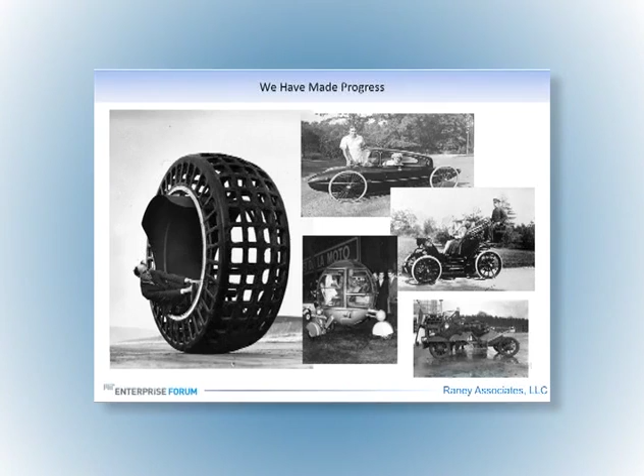Can we have the first slide? We've made a lot of progress in the history of the industry. This is stuff that happened in the pre-regulation days. In the years prior to the 1960s, when the US EPA was first established, it was just about anything goes in terms of what you wanted to put on a car or build into it, from safety standards to emission control systems. Next slide, please.

We're going to talk tonight about fuel economy. We've transitioned from the period of time when you probably struggled to even stay outdoors back in 1948, and later when photochemical smog first became prevalent in people's conversation down in Los Angeles. I've heard scientists say that if we hadn't finally understood the mechanisms of smog formation, you literally couldn't live in the basin today — which is probably true.

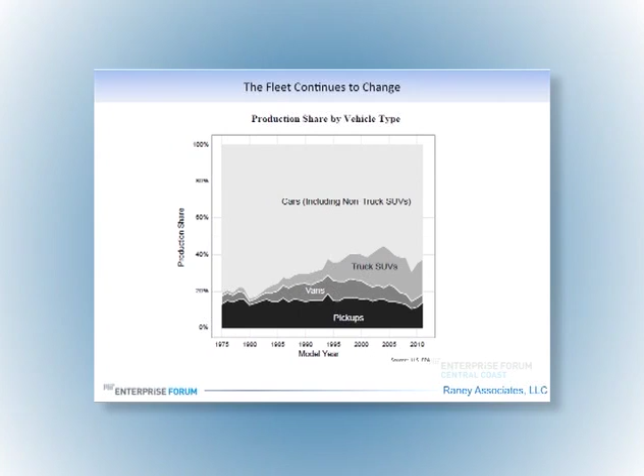This is just a shot of where we have grown in terms of truck volume. I won't spend much time on this — I've made the point. But interestingly, in the most recent fuel economy standards that hit the streets 3 weeks ago, the US EPA is not projecting much of a decrease in truck market penetration until 2025.

One interesting point is that the cost of driving is still relatively low compared to what it was back in 1985 and 1975. Compared to other parts of the world — for a gallon of gas in Norway today, you're paying upwards of $9 a gallon. In Italy, probably upwards of $7 a gallon. In the UK, it's about $8 a gallon. So we still haven't used the price point of fuel to get the customer's attention, and it is a significant influence.

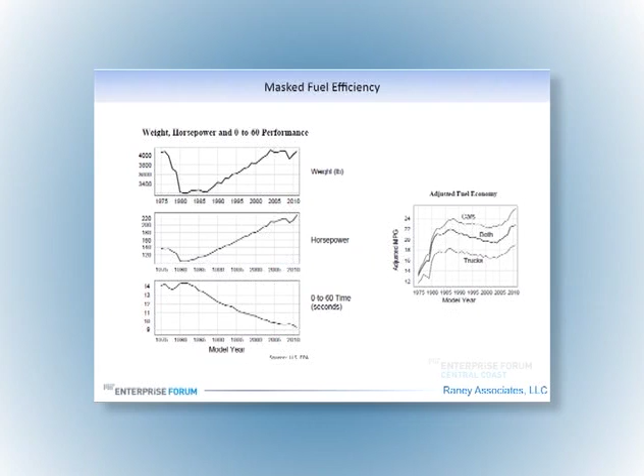This is a pictorial or graphic depiction of what I showed you in the chart earlier. There is what I called masked fuel efficiency in cars today. You've seen a tremendous increase in weight, and a tremendous increase in horsepower, which leads to a boon in 0 to 60 time.

But yet the fuel efficiency of the fleet has remained pretty much the same. So there is tremendous fuel efficiency pent up in vehicles today waiting to be capitalized, and we'll talk about some of the technology that can get at that later, in terms of mass reduction, better use of high-speed computers that can crash vehicles on a computer as opposed to running a full prototype mock-up into a wall at 35 miles an hour, as well as better use of materials, design, and optimized use of transmissions and the overall powertrain.

The key for a battery is to get as much energy density into it as you possibly can, which is why the trend today is towards lithium-ion. We started off with lead, nickel metal hydride, and lithium-ion. But the reason you're not seeing more range in an electric vehicle today, such as the Leaf, which can on a charge get between 70 and maybe 90 miles if you're lucky, is because of the cost. Lithium-ion is still very expensive compared to nickel metal hydride. So while the energy density potential is there, we're just not able to see the benefit of that yet in terms of keeping the car affordable.

On the other hand, you see where hydrogen comes in terms of the gravimetric energy density. And the challenge is getting a lot of it onto the vehicle. The big debate today, which Tyson will be talking about, is how much pressure and what size of a tank and what storage medium we have on the vehicle. The car that James drove up today has a fairly large tank, charged to 5,000 psi on average. The challenge today is talking about going up to 10,000 psi, which can increase the range of these vehicles considerably.

Next slide. One of the things you're going to see as well, and the EPA actually figured this into their program, is a tremendous benefit from mass reduction. We're looking at anywhere upwards of 10 to 15% mass reduction. But why don't you go to the next slide? I don't want to spend much time on this.

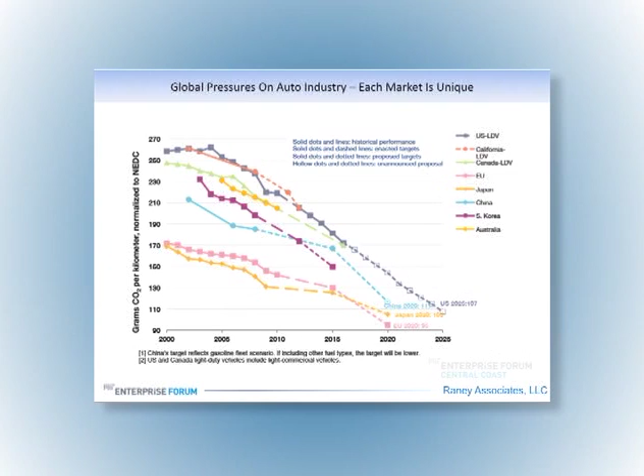Taking a transition now into the history and where we've been, the United States, frankly, has been lagging the rest of the world, believe it or not, in trying to get at CO2 emissions and fuel economy standards for the past many years. I think we can owe it to our elected and appointed officials in the state of California, who essentially stimulated the federal government to move to where they are today. AB 32 really has been a stimulus, not only to the auto industry, but also to the federal government to act. And we are at the point today, with new standards proposed moving into 2025, of actually getting in line with the rest of the world, which has some of the most stringent CO2 standards now in automotive history. Next slide.

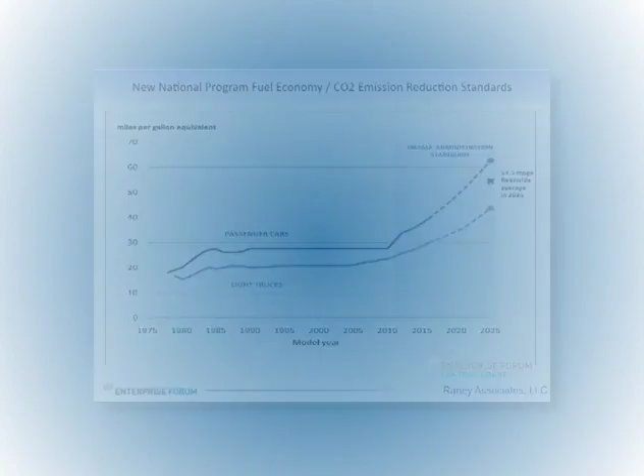This is an image of what happened three weeks ago. As we talked about earlier, CAFE standards had stagnated for cars at about 27.5 miles per gallon. They were at 22.5 miles per gallon for light trucks for many years. There was a bump up. And it wasn't until the 2008-9 timeframe, when the state of California began to propose their own CO2 standards, that essentially sent shockwaves through Detroit and woke them up to the point of actually agreeing to new standards from the federal government. So it was the state of California and the California Air Resources Board that actually started this.

You may recall that the auto industry was in litigation in, I think, five venues, five separate courts, trying to block the state of California from adopting CO2 standards. And the Obama administration brought the auto industry and California to the table.

The auto industry agreed to back off the litigation, and California agreed to back off on adopting their own regulations. So the federal government recaptured the authority. But what has happened is, again, to continue to keep California at bay, the auto industry has had to agree to standards they never would have dreamed of agreeing to five or ten years ago.

So it's been a very interesting political process, and the targets that have been proposed are shown here, and in CO2 numbers, the target in 2025 is 54.5 miles per gallon. It's a two-pronged standard in the sense that EPA cannot regulate fuel economy, they can regulate CO2. The National Highway Traffic Safety Administration, DOT, the people that have managed the standards for all these years, can manage CAFE, or fuel economy.

So you've got two standards. The CAFE standard under NHTSA is actually 49.6. That's their target. But it's still pretty significant in terms of where the auto industry has to be.

This is a little bit of the form of the standard. It's very unique. In the past, the auto industry essentially had one number to deal with, 27.5 miles per gallon. You had cars higher than that and cars lower, and you averaged them all together, and you came up with a certain number to meet the standard.

It's changed a little bit in the sense that now we have what's called a footprint-based standard. It's a little bit of a complex chart to try to explain in a small presentation here, but essentially, you have the smaller cars shown on the left side of the screen. This is just the car-only model, but they have to meet a higher standard, essentially, than trucks do, or larger cars, which are on the right end of the screen.

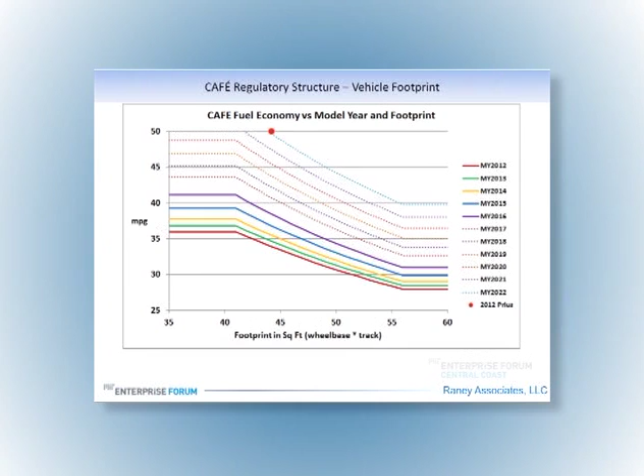Now, if a manufacturer only builds cars that are in the smaller footprint area, you can see that they kind of get the raw end of the deal here. So it pays manufacturers to have a broad fleet. Frankly, a lot of people have complained that this favors only the large manufacturers based in Detroit.

When the Obama administration asked the auto industry to come to the White House and sign the agreement that they would all support the new fuel economy standards, there are two members of the auto industry that didn't come, Volkswagen and Mercedes, and you can read their statements filed on the federal docket. They were very vociferous in their remarks that they think this is just a giveaway to the Detroit automakers. Some people would probably agree with that.

EPA is finally contemplating actually changing the label and the metric. I hope we see it in the next 5 to 10 years, but it gets people's attention in a lot more ways to maybe not be so stubborn about getting out of one of their very large vehicles and moving just one class up. It does make a huge difference.

Next slide. So what's on the radar? Midterm evaluation in the 2017 to 2018 timeframe of the Federal CAFE program. You'll have the ZEV market and the CARB regulation in the post-2012, and it probably is going to have to be revised again sometime, maybe 2014 or 15. And they probably still won't get it right, but they keep trying, which is good.

We'll have to really pay attention to market success of new technologies. Certainly, higher penetration of hybrids are on the horizon - you're going to see a tremendous new market for these vehicles. Diesel is still questionable because of the cost of the after treatment and low emission standards they have to face. And then there's the higher cost of compact vehicles. Ford is doing a very interesting experiment with loading up, for instance, the Focus, really getting the noise, vibration and harshness characteristics down on the vehicle, but loading it up with technology and customer convenience features, and they're pricing the car accordingly. It's kind of a market experiment.

But then you have the hydrogen fuel cell vehicles, which, frankly, I think the majority of the auto industry will tell you is the holy grail. And the Air Resources Board will tell you the same thing. So we're going to hear some tonight on the continued expansion of infrastructure support for advanced vehicles. And there's also some considerations for how to measure real-world fuel economy to get at this in a more realistic way.

First of all, what's a fuel cell electric vehicle? Some of you saw it out front—the Honda Clarity is a perfect example that James brought up. What it does is store high-pressure hydrogen in a tank up on top, and that hydrogen is run through a fuel cell.

That fuel cell dissociates the electrons from the hydrogen when it meets the anode. It takes those electrons, puts them around, and creates an electric current, and then it recombines at the cathode site with oxygen from the air to create water vapor at the end. So basically you have an electric current driving an electric motor, which is why it's an electric vehicle.

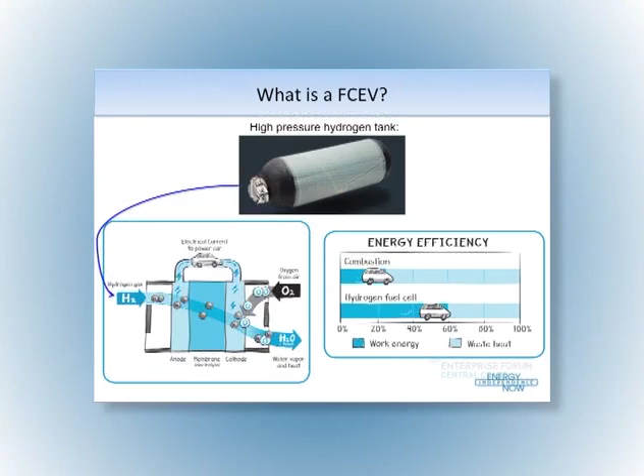One of the appeals of this is that it's a very efficient process. Compared to combustion, you can see on the graph there on the right, a hydrogen fuel cell vehicle is 2 to 3 times as efficient on an energy basis.

This is a picture of the Honda Clarity underneath the belly out there, just to show you that the tank is in the back, the fuel cell is in between the driver and the passenger, and then there's an electric drive motor in the front.

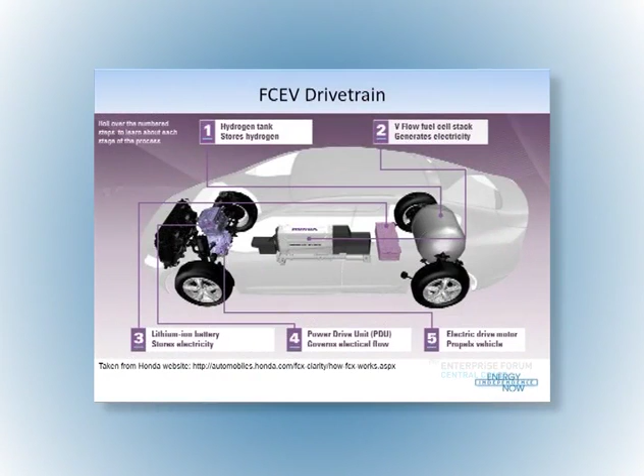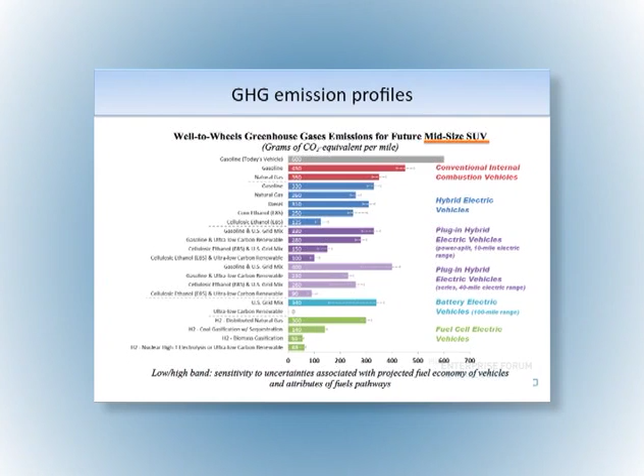This is a graph put together by the Department of Energy. What I want to point out is that on today's mid-size SUV, we have about 600 grams of CO2 per mile—that's at the very top. Looking down at the bottom, you see the battery electric vehicles and fuel cell electric vehicles—we can cut that significantly. It's a similar story for criteria pollutants like NOx.

Fuel cell vehicles are actually ready to be a prime family vehicle. That's part of their greatest appeal. They have quick fuel-up, long range, and can be scaled up to all vehicle classes, from small compact vehicles all the way up to Class 8 trucks. The personal garage is not necessary, so people living in multi-dwelling units or apartment buildings could own a zero-emission vehicle and fill up at a local fueling station.

So what's the opportunity? Just a few weeks ago, Global Industry Analysts Incorporated came out with a study showing that hydrogen production and storage capabilities are projected to reach $1.4 billion by 2018 in value. And that's just looking at storage and production.

So what I wanted to talk about is how we can get a slice of that pie as an entrepreneur and join in there. I'll get into these bullet points much better as we go on. So we can go to the next slide.

There's substantial momentum behind the industry. Automakers have already invested billions of dollars in the technology. As David said, you don't read about it all in the newspapers - you haven't heard a lot about hydrogen and fuel cell vehicles. And even without the press, automakers have been pouring money into this. The industry has met or exceeded almost all Department of Energy targets, and that's a really critical factor.

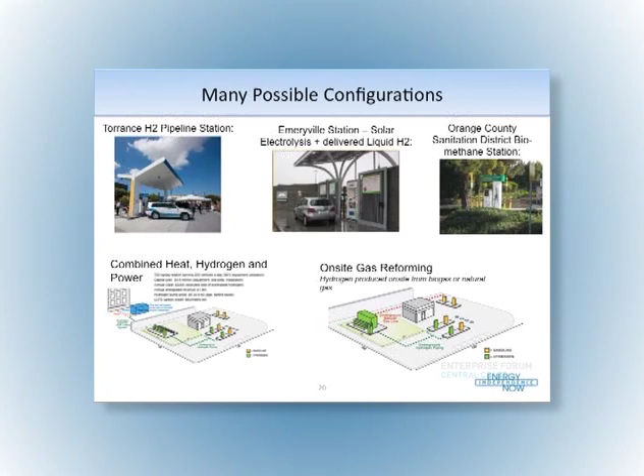You can also create hydrogen on site with on-site natural gas reforming, or do a combined heat and hydrogen power type of application. Another interesting thing is tapping into renewable energy.

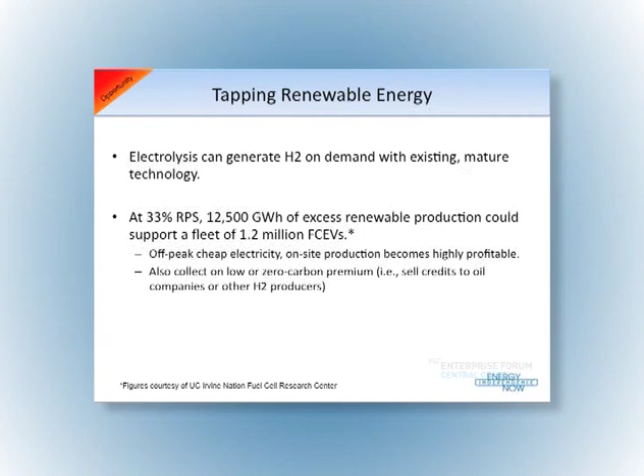They have electrolysis systems available today where you could use electricity to split hydrogen off of water and create hydrogen that way. In 2020, the state of California has a 33% renewable portfolio standard target. If we have 33% renewables on our grid, there's actually going to be excess electricity that doesn't have a place to go, enough to support a fleet of 1.2 million vehicles. That's about 12,500 gigawatt hours of electricity spare. The next slide shows this.

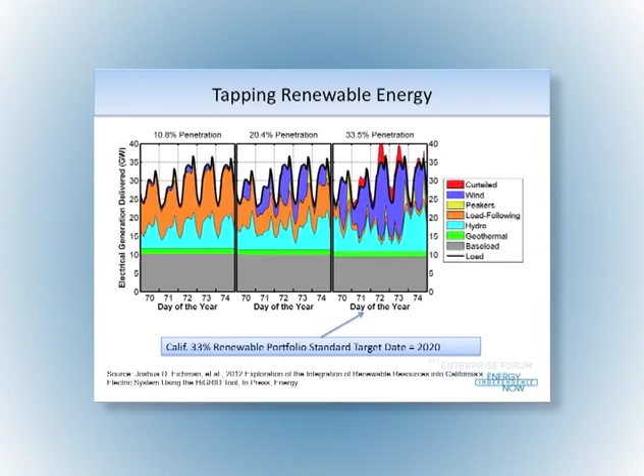This is a graph of springtime electric production done by UC Irvine. At 10.8% penetration, those blue peaks on top are the wind. At 20.4% production, that wind starts to take off a little bit of the load-following type of electricity. At 33.5% production, those red peaks are places where electricity has no home. As we get into a more renewable-based grid, there's going to be more opportunities to take that electricity and put it to productive use.

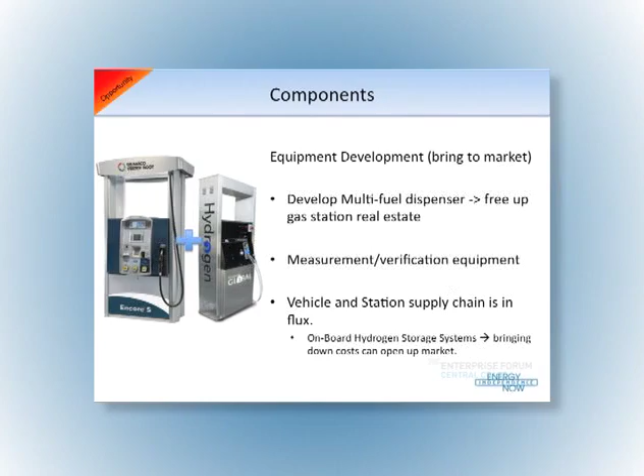Measurement and verification equipment—they're still working out how to measure and accurately pay for hydrogen. You want to make sure you're getting the molecules that you pay for, and that's something still under development. The whole vehicle supply chain system is still in flux, and that's something Ichiro can talk about.

We're working on currently getting a plan to get a station in Santa Barbara here. David and I are working together to educate officials and make sure that when the time comes in 2 or 3 years, the community is ready and it goes as seamlessly as possible.

So just things to keep in mind: fuel cell technology is becoming more and more off the shelf. Developers can focus on different configurations, and there's a variety of opportunity for revenue streams, and champions are needed to drive the market. So if we can all pull it off, it's better for everybody.

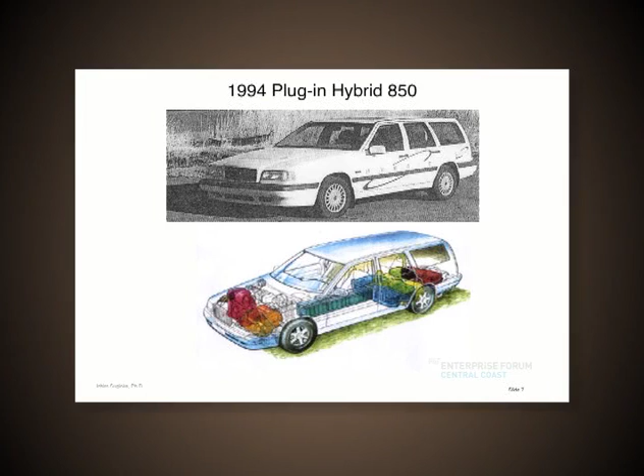This would have been the product that we would have started selling in 1998. This is a prototype that was built in 1994 on the 850 model. As you can see, this is what Volvos looked like back then—they don't look like that today. And this car had a 3-cylinder engine to generate electricity to charge the batteries if you wanted to go long distances.

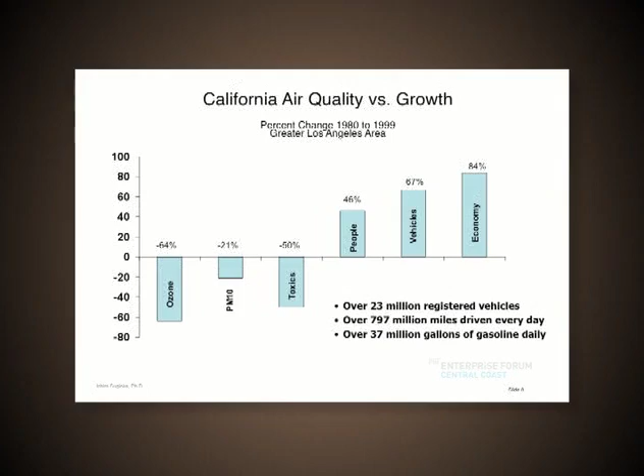So this is something we built in 1994. But what happened is that after we were all ready to start selling this in 1998, one of the things that started happening around that time—and this is data measured in 1999—is that the air got really, really clean. Even though the population and economy grew significantly between 1980 and 1999, the pollution levels dropped.

Why is that? This is an interesting and totally unexpected thing. This was done without electric cars. Even though the electric car mandate was created to reduce pollution, it happened without electric cars. Why is that?

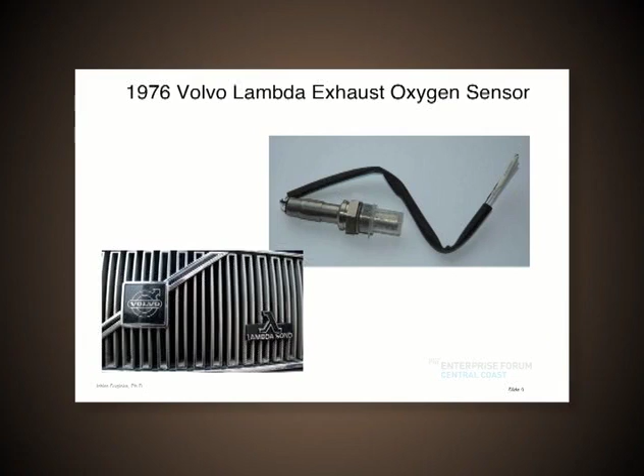It turns out that a technology Volvo introduced in 1976 called the lambda sond—another name for it is an oxygen sensor in your exhaust pipe—allowed the catalytic converter in your car to work more efficiently. Volvo introduced this in 1976 to meet the California Air Resources Board requirement for lower emissions.

And that was something the big three were fighting at the time, back in the early 70s, saying this can't be done. We kind of by accident in the lab realized that by being able to measure this oxygen level, we could actually reduce the emission level quite significantly. And Volvo actually developed this ourselves.

Just to give you a comparison on the alternative to an oxygen sensor—being at Caltech, I get to talk to a lot of people at JPL, and one of the gentlemen there was a former assistant director of JPL, Duane Dipprey. At the time he was developing hydrogen injection for piston gasoline engines to reduce emissions. Just think about that—he has always credited Volvo for putting his research program out of business, because essentially we did it without using hydrogen. Kind of gives you an idea how technology turns, doesn't it? I thought that was kind of fascinating.

But anyway, what happened is that the car companies, including us and others, became very good at using this technology so that we were able to create something called super ultra low emission vehicles. Those became what's now known as PZEVs, partial zero emission vehicles.

This is a Volvo hybrid that we built. It turns out the transmissions on the front-wheel drive Volvos introduced in the early 90s with the 850 model used transmissions supplied by Aisin in Japan. This is a really nice company.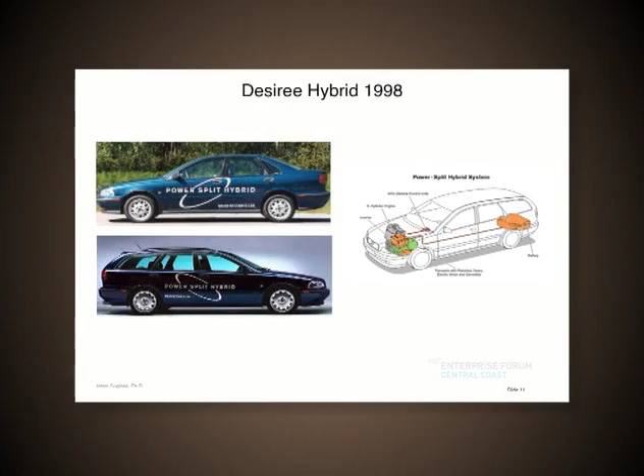And we really liked their front drive transmissions for automatic transmissions, and we've been using that. Together we worked on what's called a power split hybrid transmission with Aisin. It turns out that Toyota developed their own hybrid transmission on a similar concept independently, at the time Toyota and Aisin were separate companies. Anyway, we had two cars that we started to experiment with in 1998.

In 1999, Ford bought us, and one of the things they got was the hybrid transmission technology. They put it in the Escape Hybrid. There is proof that this is the case, because they don't like people to know that they're using Volvo technology in it. But if you go to the website and look for the first press release on the Escape Hybrid, it mentions this.

One of the other things that might be interesting about Ford is that the Escape Hybrid does not have Toyota technology in it. It turns out that Toyota did something smart when Ford started to do this - they got so concerned that they bought 51% of Aisin. So that's another interesting little twist in how technology turns, isn't it? So now Ford had to negotiate with Toyota to use this technology. But anyway, I digress.

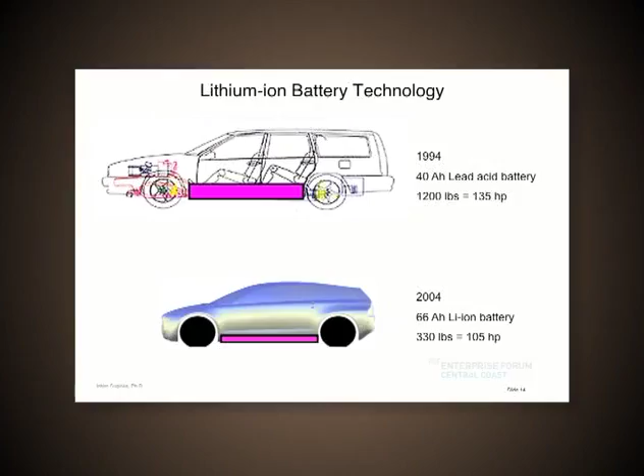I did this on my own using CAD models I had available. In the case of 1994, I did not have a CAD model - I had to scan a drawing and scale everything to size to show you that in 10 years, the size of the battery needed to move the car changed this much. Actually, the smaller car with the smaller battery has 50% more range. And the fact that the car is smaller because the battery is smaller allows you to have less power required for an electric motor.

Just to give you a glimpse of the scale, because this is kind of a PowerPoint representation - the car on the bottom is the first lithium-ion battery car built at Volvo. It's called the 3CC. I have one picture of it at the end of the presentation. This was pretty much a way for us to learn how lithium-ion batteries degrade over time.

So anyway, here is the actual battery module from that car, and this is how thick that is - that bar you see on the bottom shows the thickness. That car had 96 of these bricks, just to give you an idea. At the time, there were no automotive lithium-ion batteries available, so you can see I just welded up a lot of laptop batteries. That's how we learned how these things degrade over time and how they heat up. So that's what that program was, if you want to take a look at it - as long as you don't take a picture, because there's something in here I don't want people to see.